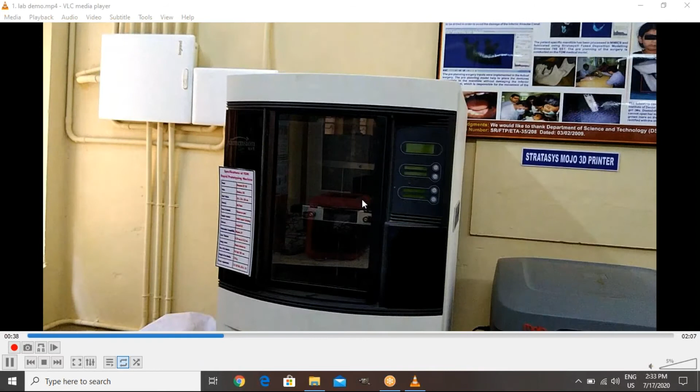This is the dual monitor working station we have at NIT Warangal, and this is the Stratasys Mojo 3D printer along with its post-processing unit. This is a Dimension SST 768, which is also a 3D printer we have, and this is the Ultimaker 2 Plus 3D printer. This is the FlashForge Finder, and this is the micro finder, and this is one more workstation we have.

This is an object scanner we have at NIT Warangal. We have two different kinds of scanners, and this is a ProCircuit which is used exclusively by the MTech additive manufacturing students. They are working here, and now we move on to the metal 3D printer lab at NIT Warangal.

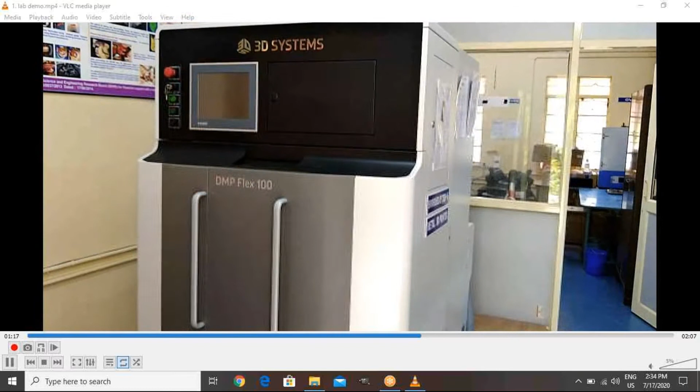This is inside the metal 3D printer lab. This is the metal 3D printer DMP Flex 100 at NIT Warangal, which is capable of producing metal parts. This is the workstation used exclusively for this machine. It's a high-end workstation with 32 GB RAM.

This is the post-processing unit at NIT Warangal. These are the various post-processing units used after printing a part: bandsaw and muffle furnace, as well as a powder receiver, shot peening machine. Here we can see the different types of cylinders - black color, blue, and some brown color - and an air compressor dryer we have here. This is the oven especially used for preheating the powder at NIT Warangal.

Now we move on to the specifications of each plastic machine at NIT Warangal. This is the Mojo 3D printer we have. It is a Stratasys-made 3D printer. The Mojo 3D system builds the model from the CAD STL file that's sent to the system using a USB cable from a dedicated host computer.

This is the printer. We can clearly see there are two print heads. This is one print head, and this is the other print head. These print heads can build parts simultaneously - one print head is for support material, and the other is for the main part material. The support material and part material are both different.

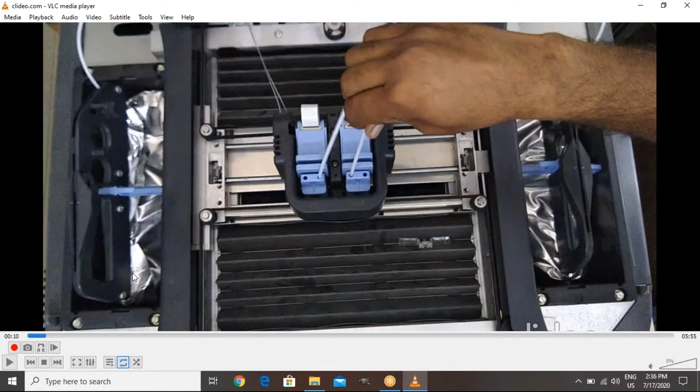We can see here this is the cartridge - this side is the left side and this is the right side. We have cartridges on both the left and right sides, and we load the material in the form of a spool into the cartridge.

Now this is the inside chamber of the Mojo 3D printer machine. We can see this is the 3D printer machine. The build volume for this machine is 127 by 127 by 127, and the layer thickness we can achieve using this machine is about 0.17 mm.

These are the various parts which were produced using the Mojo Stratasys 3D printer.

This is the mandible, some parts we can see here. This is the chemical treatment equipment we are using at NIT Warangal.

This is used to remove the support material. The support material we use, for the Mojo Stratasys 3D printer, is water soluble.

Now what we'll do is take a part that was printed with the help of support structure, and place it into the chemical treatment chamber. We'll close it, pour some water, and wait for the specified time for removal of the support material, as mentioned in the soluble time for that material.

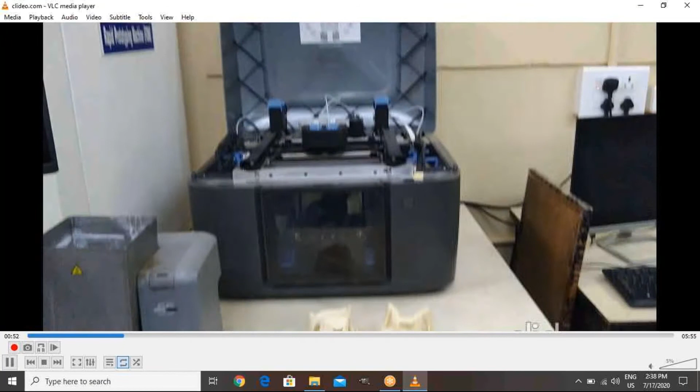After closing it, we wait until the material dissolves, then remove it and take out the parts.

Now see, these are the various parts produced using this 3D printer. This is the mandible part, and these are all our medical parts produced using this Stratasys Mojo 3D printer at NIT Warangal.

The parts produced here are stronger compared to the Ultimaker or the FlashForge Finder we have at NIT Warangal. So these are the various parts produced using this 3D printer.

Next, here is the slicing software we are using, the Print Wizard version 1.2, used at NIT Warangal. That software was provided by the vendor only; it is not freely available software.

Now we are moving on to the next facility we have at NIT Warangal, the Dimension SST 768 FDM rapid prototyping machine, also made by Stratasys USA. Now see here, these are the various parts produced: inlet manifold and turbine blade.

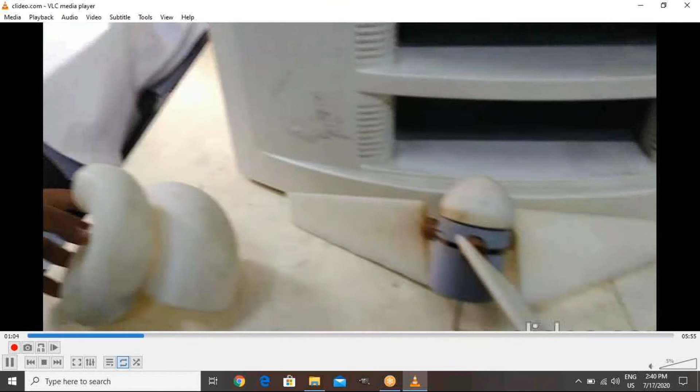This is the inlet manifold, this is the turbine blade, produced by MTech students under Ravi Kumar sir. They worked on this project and successfully demonstrated everything using this machine.

Now we move on to the specifications, which I already explained for this machine. The material we use here is also ABS plastic, in the form of a filament on a spool, along with support removal.

Here the support material is also different from the part material. We feed these two materials in the form of a spool.

The layer thickness for this machine can be changed between two values: 0.254 mm and 0.33 mm. These can be adjusted in the software. The energy source here is a heated extrusion tip, meaning this is an FDM-based machine at NIT Warangal.

Now we can see the build volume. We are opening the window to show it. This is a very large build volume, about 254 by 254 by 305 mm.

Therefore we can produce large parts. Our students produced the inlet manifold as well as the turbine wind blade using this machine, successfully simulating and fabricating them.

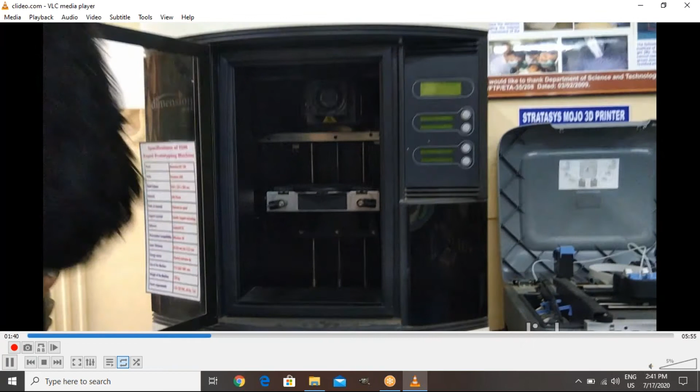Now I can show you the various parts again, which I already showed you here.

The drawback with this FDM machine, the Stratasys Dimension and Mojo 3D printer, is the cost of the spool material. The Stratasys Dimension SST costs around 10,000, while the Mojo 3D printer costs around 10 to 15,000. Because of this high cost, nowadays people are moving to the Ultimaker and FlashForge Finder, since the spool cost is much less for that material.

Now this is the Ultimaker machine we have at NIT Warangal, and I'm going to demonstrate this machine after 5 minutes.

Let me tell you the specifications for this machine we use at NIT Warangal. The technology here is fused filament fabrication, and the print head is a single extrusion print head with a swappable nozzle.

The swappable nozzle means here we are changing the nozzle. We have different types of nozzle. Let us say there are four kinds of nozzles available in our machine: 0.25 mm nozzle, 0.4 mm nozzle, 0.6 mm nozzle, and 0.8 mm nozzle. These are the four different types of nozzles we are using at NIT Warangal.

Already we know what happens when you change the nozzle size. When you change the nozzle size, the deposition of material from the print head increases, the time taken to fabricate a component decreases, and the production rate increases. That's why we are using the swappable nozzle technology here.

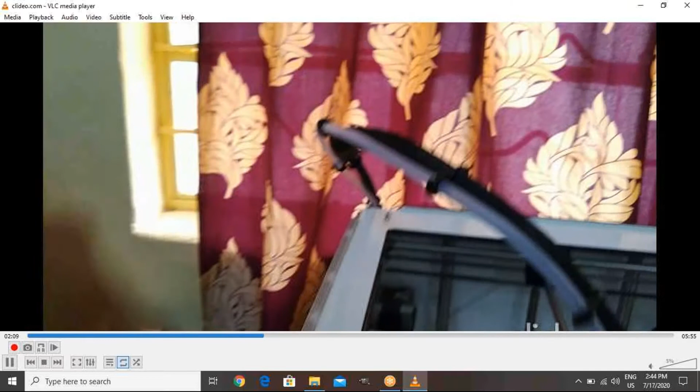We can do the preheating, and this is the filament we are using. The diameter of the filament we are using here is 2.85 mm. The filament for this machine we can directly get from Ultimaker or third party vendors also. Let me say Think 3D. Think 3D is one of the largest suppliers of filament in Andhra Pradesh as well as Telangana. It's headquartered at Vizag. They are supplying this filament for us for the Ultimaker.

It's very low cost. The cost for this filament is about 1500 rupees only. It is also compatible with this machine, and we are producing excellent parts with this. I will explain this later in the working principle of the Ultimaker machine.

And see here, one advantage with this: to run this machine we don't require any host computer. Previously for running the Mojo 3D printer as well as the Stratasys Dimension SST, we needed to connect a host computer or dedicated computer. Here we don't require any separate computer, just an SD card is required.

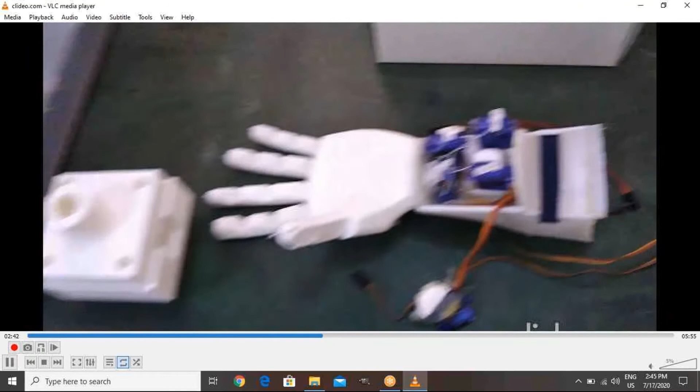These are some finishing tools we are using for removing the support material from printed parts. These are some parts which were produced: a robotic arm as well as a skull, and some plummer blocks. Next we move on to the FlashForge Finder 3D printer we have at NIT Warangal. This is a spool which we are using for this machine.

Now this is the FlashForge Finder where we can see the display, and in the display we can control each and everything. Loading of material, changing of material, everything is controlled with the help of the display. It's easy to operate. People are using FlashForge Finder and Ultimaker because it's a very open environment and very easy to operate.

This is also fused filament fabrication technology. For the FlashForge Finder, we use the FlashPrint slicing software to slice a part. The files can be transferred using a USB cable, USB stick, FlashForge Cloud or Polar Cloud. And here is the filament we are using, a 1.75 mm diameter filament.

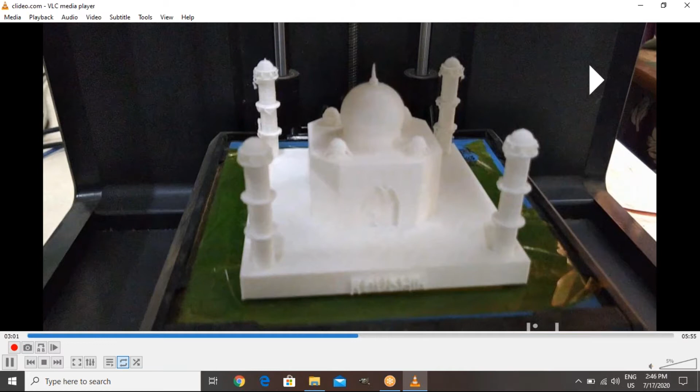See, this is the part. The build volume for this printer is 140 mm by 140 mm by 140 mm. The materials generally adopted for this machine are ABS plastic and PLA. These are the two materials we use at NIT Warangal, and the layer thickness can vary from 0.05 to 0.4 mm. These things we can select in our software. The build accuracy is plus or minus 0.2 mm.

Now see, this is the extruder nozzle, the print head, where we can insert the filament. These are some complex parts which were produced, like the Taj Mahal, in our machine. This is the spool we are holding separately on the spool holding device. This is the filament we are using, that is 1.75 mm. These filaments are easily available.

Now we are moving on to the EinScan scanner. We have a 3D scanner. This is the EinScan scanner. It was already explained by Rakesh in the previous lecture. We are using it at NIT Warangal for reverse engineering purposes, to get the dimensions of an object.

Now we have the 3D scanner. This is the body scanner we are using at NIT Warangal. This was also explained by Rakesh previously. We are using this machine for reverse engineering purposes. This is the workstation we have at NIT Warangal.

Next, we move on to the Prusa i3 3D printer kit. This is the DIY printer we are using especially for MTech additive manufacturing students at NIT Warangal. Let me show. This is the DIY printer. The NIT Warangal MTech students are using this printer.

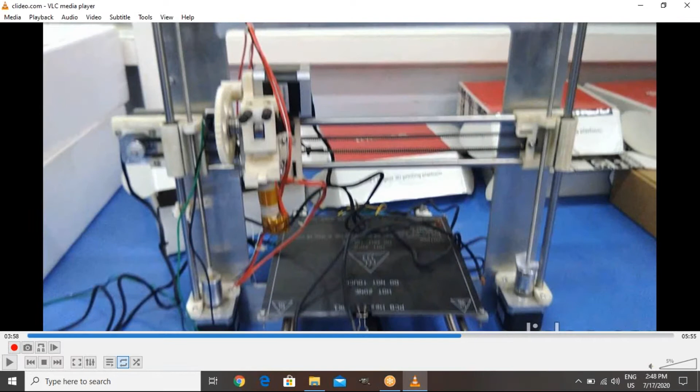We bought only the parts for this machine, and our students are learning the subject, how to assemble it, the principles behind installing this machine, and the Arduino software to run the machine.

To run this 3D printer's RepRap movement, the Arduino software is required. Therefore our MTech students are learning the software, and this was assembled by our MTech students in our lab itself.

There are two different kinds of DIY printers at NIT. This is one more printer we are using right now. Both are working, but we are using one 3D printer. The students are able to work on these machines.

Next, I will explain what software is available at NIT Warangal. These are the seven different software packages licensed in our lab. One is Materialise Mimics 18.1. This software is especially used to model medical models. For a medical model, we don't have any inner dimensions of the heart, lung, bone or anything else. We don't have any direct dimensions. They vary from person to person.

To model such parts, we take CT or MRI data. CT data is generally used for hard tissue, that is bone, whereas MRI is used for soft tissue, lungs and heart. We import the data into the Mimics software, where we can use various segmentation tools to separate the part we want to print using the 3D printer. So Materialise Mimics is generally used for medical model design at NIT Warangal.

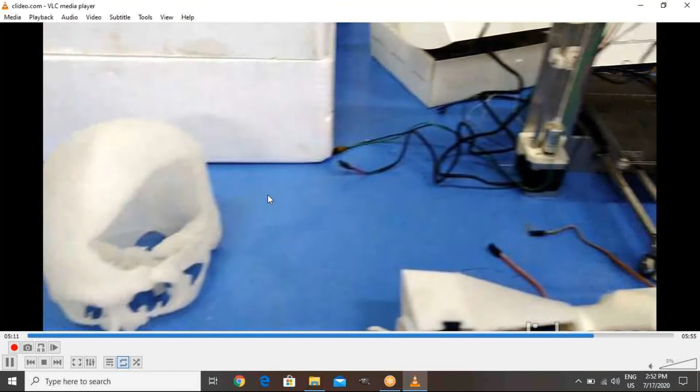This is the robotic arm. This is an animal which was produced in our Ultimaker machine by getting the STL directly. This is the block which has been produced. This is an SLS part, how such a complex part was produced by using the SLS machine. See, this is a block, an arrangement which has been produced.

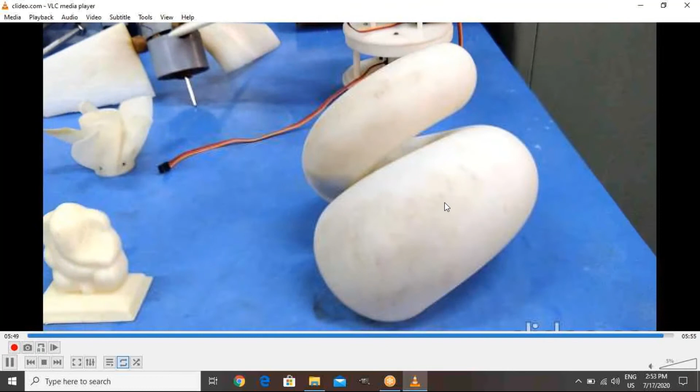So now we are moving on to some engineering parts which have been produced by using this machine. This is a universal coupling which was produced. This is the turbine blade. This is the robotic arm our MTech students have made. This is a Ganesh idol which was produced by using the Stratasys Mojo 3D printer.

Now we are moving on to the Ultimaker demo; the working principle, how to load and how to print, everything I will explain here. This is the printer. This is the print head, the extruder nozzle print head. This is the sharper one. Now this is the vertical screw used for the movement of the vertical z-axis. Now we can see this is a top view. This is the movement. The nozzle can move in x and y direction.

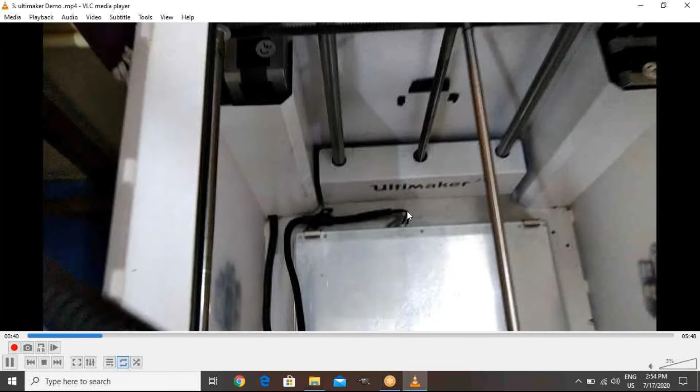See here, I am just showing the movement only, but it is not fully controlled movement. So this is the build plate we are using. The build plate is 200 by 200 by 200. These are the heating and cooling coils we are using. Now see here, this is the build plate. The advantage here is it has vertical movement. The screw is used to support the vertical movement of the build plate once we start the machine.

Now we are going to start the machine. Now I switch on the machine. When I switch on the machine, there are three things. This is the SD card slot. This is the screen. This is the push and rotate button. The push and rotate button is used to operate each and every function, where we can select the material and different options, the maintenance and material, print, everything is there.

See, before we start the machine, we want to generate the G-code file. The part which we want to print, we have already generated by using the Cura software. That part we are using directly from the SD card. Now before starting the machine, I want to load the material. For that reason, see, in the display there is an option. We want to select the material, so that we can load the material.

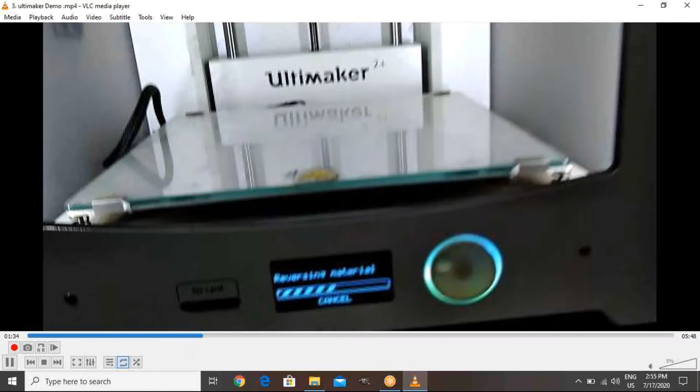Now I am going to load the material by using the push and rotate button. I am selecting the material option. When I start, the nozzle will be moving, but I am still not inserting the material. I am going to insert the material. Now we are using the Ultimaker supplied material. See here, it is reversing the material. That means some material is already there in the machine. That material we are removing, so that we can insert the new material.

And this is the spool holder. This is the feeder. In Ultimaker, we are using this Ultimaker material; this is a PLA material we are using at NIT Warangal. Here this is 2.85 mm diameter. There is a black color spool holder at the back side. I am holding this material at the spool holder in counterclockwise direction, not clockwise, counterclockwise direction.

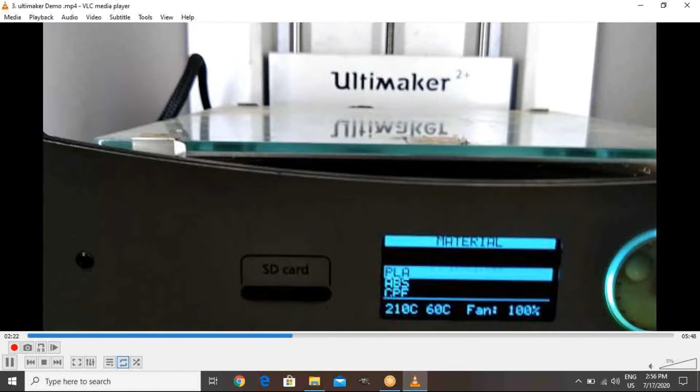Now why I'm cutting the material here is to make it sharp; I want to feed the material into the feeder with a sharp end. That's why a little part of it was cut by using the cutter. Now I am selecting the material by using the push and rotate button. See here, where we can select which type of material. I'm selecting the PLA material by using the push and rotate button. After selecting that, click the push and rotate button. Now it shows heating, heating up the nozzle in preparation for inserting the material.

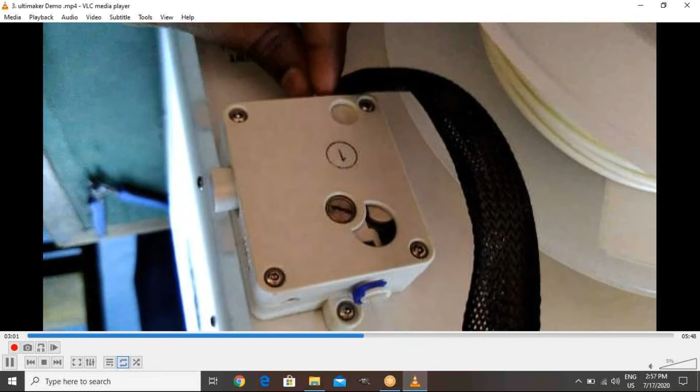So just wait until the nozzle is getting heated, then only we can easily insert the material. This is the feeder we are using here. In that feeder we are inserting the material, not pushing hard, just gently insert the material, just a little bit only. The feeder automatically will take the material. No need to continuously insert the material. Just wait. Once the nozzle is heated, the material will be automatically fed from the feeder to the Bowden.

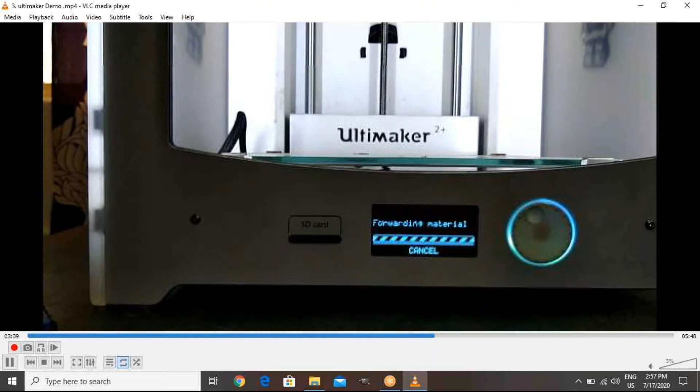Now we can see the material which is coming out from the nozzle very clearly. Just forwarding the material from the feeder to the Bowden pipe to the print head, that is the nozzle. Wait till material is coming out from the nozzle. Just wait a minute. We can see very clearly the material which is coming out from the nozzle. See here, this is the material which was extruded from the nozzle. So we have successfully loaded the material from the backside to the nozzle.

Now next we want to load the part. We are going to print that. We are having the SD card. In that SD card, we have already saved the file, and we have already sliced it using the Cura software, which generated the G codes. That file was copied to the SD card, and that directly we are giving to the machine. No separate system is required to run this machine. Just SD card is enough, or USB cable is enough. SD card is very easy.

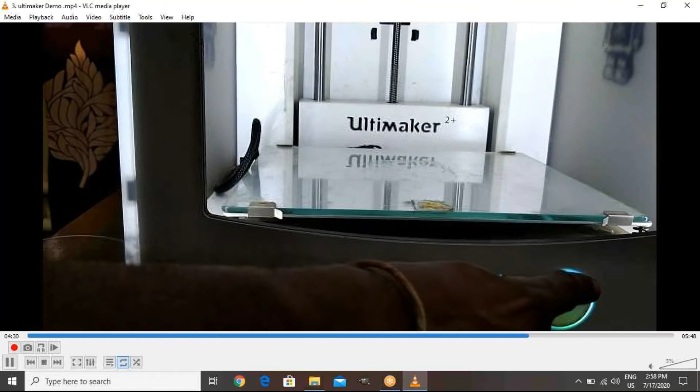Now, from the SD card, there is print. I want to go for print. After selecting print, there are a lot of print files. Now the part which I want to print, that file I am selecting here. Now wait, it is preparing to print your part, and it's tuning for printing. Once it starts printing, the build plate goes in the upward direction. Once the layer is printing, the build plate comes down by the layer thickness.

Here, this is a little bit of material which comes out from the nozzle at the end of the build plate, just for checking the tuning. And now it starts printing our material. I have given the printing of a scaled skull part model. Now it starts printing. This is the first layer, the slicing of the first layer. For this part I have given the raft. You know the meaning of a raft.

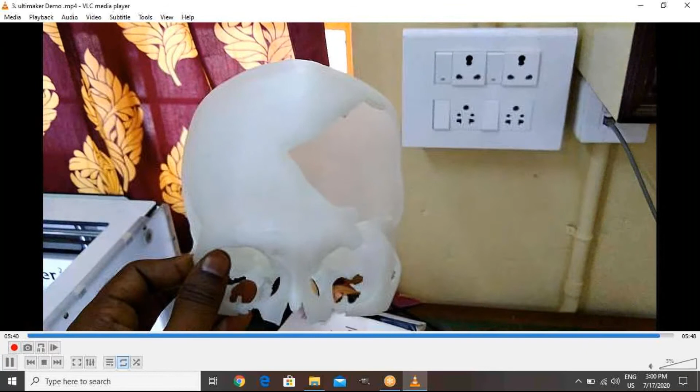Now the display shows the time left for printing our part. It shows 3 hours for my part. If it is a complex part, it may take one day, or sometimes 2 days, depending upon the part. This is the part which I have produced using this machine. I have given less support. See, this is a very less support structure. This part I printed using support structure material, which has been removed.

Now this is about the polymer printing machine we are having at NIT Warangal. Next I will hand over to Banerjee, who will explain the DMP Flex 100 machine at NIT Warangal. After that I will explain post processing.

Banerjee, hello Banerjee. Just hello. Start. You start. Banerjee. Okay. I will make you the presenter.

Okay. So now Banerjee will explain the working principle of the machine. I'm handing over to Banerjee. Later I will start, and finally we'll discuss the questions after completion of the session. Start, Banerjee.

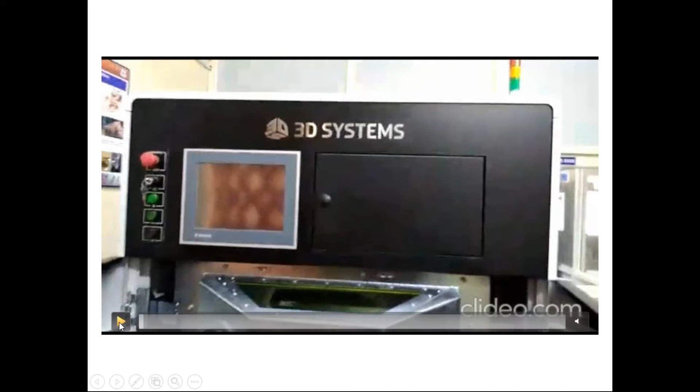This is the control panel. It acts as an interface between operator and machine, where we give the input commands to the machine. This is the laser assembly. Inside we can see the lenses and also some electrical components.

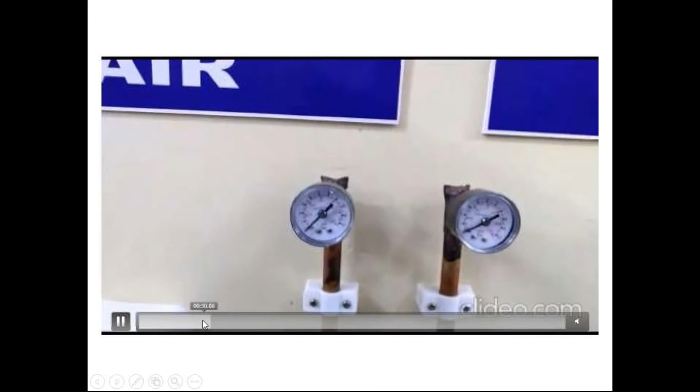These are the valves. This is the gas valve, and this is the air valve. Before starting the machine, we need to turn on the gas and air valves to create an inert atmosphere inside the chamber. And this is the process filter, on the backside of the system. It extracts the fumes and particles generated inside the process chamber during the process.

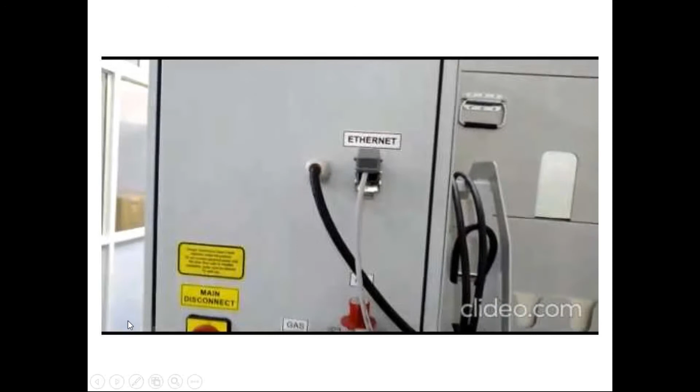This is the input to the system, where we can see the main supplies of gas and air. Before starting the process, we need to ensure the gas and air are always on to create an inert atmosphere inside the process chamber. This is the Ethernet connection, and this is the main switch for the control panel. This is an air process filter to remove impurities in the air.

And these are the controllers. Here we can see the pressure inside the chamber as well. These are the main controls; all electrical components are involved in this.

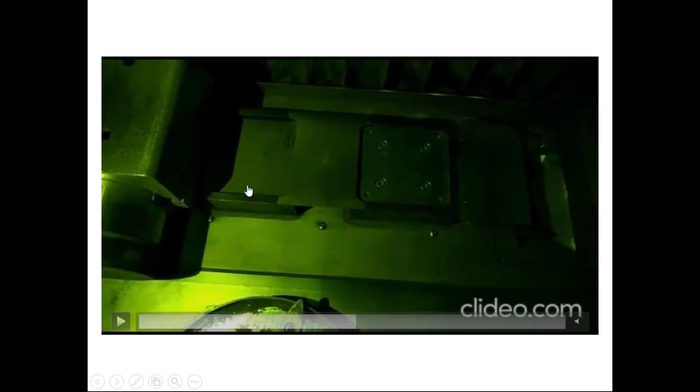Now we look inside the process chamber. This is the supply piston; we supply the powder through the supply piston. This is the platform between the sintering piston and supply piston. This is the sintering piston where the laser sinters the powder. This is the scraper and roller. This is the collecting tank where the unsintered powder will be collected by overflow clamps.

Next, I will show how this process works. Inside, you can observe the airlock. Now it is on the process chamber side, and by clicking the airlock button, we can access the airlock. You can observe the fiber brush to clean the whole process chamber, and also the Allen wrench to fix the substrate on the sintering piston.

Now this is the airlock. As I explained, now it is on the process chamber side. By clicking on airlock, we can access the airlock. We can keep accessories like the fiber brush and Allen wrench, and also a tamping plate to compact the powder for every 30 mm of powder inside the supply piston.

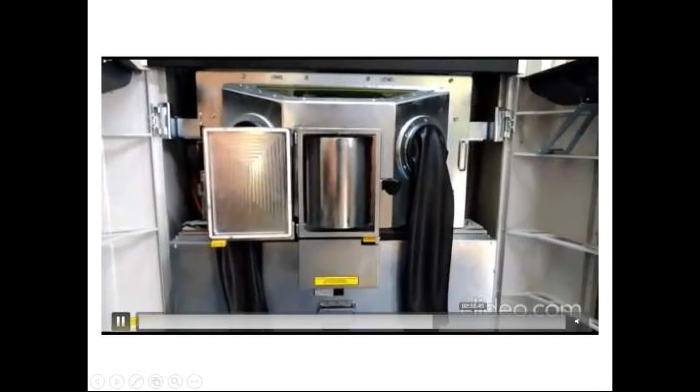By turning the key with the help of an Allen wrench, we can access the lenses, the laser lenses. Before we start the process, we need to clean the lenses thoroughly with the help of aerosol, and we need to wipe with the help of an optical towel before starting each and every process.

Now basically how we proceed: first we create the CAD part, then we import it into 3DXpert, and also orient the part as per requirement. After that we give supports and convert it into a Fab3 file. This machine only supports Fab3 files. Then we can pull the part, and this is the final part. If you want to relieve any stresses in the component, we need to do post processing.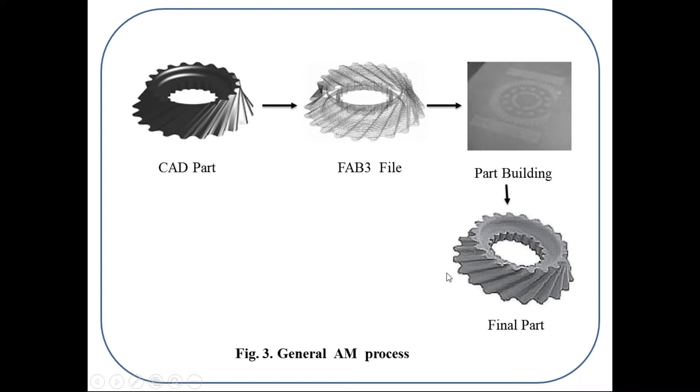These are the main steps involved in the DMP Flex 100. First, build plate loading. We need to load the plate before starting the process. This we can say is sometimes called substrate.

And build plate reference searching, where build plate reference searching means where the build gets started. We need to keep up to the boundary level, meaning where the build gets started.

And material loading and tamping. We need to load the material into the supply piston, and also tamping to compact the powder for every 30 mm height.

And powder bed layering: we deposit the first layer in such a way that it's without cracks and voids on the first layer. Remember, before starting the process, we need to create the first layer without any voids and cracks.

And later we have to do lens window cleaning. Then we go to process chamber inerting to create an inert atmosphere inside the chamber to avoid oxidation. Finally, we build the process.

Here, build plate preparation and loading. We need to clean the build plate thoroughly with degreaser, using a towel with degreaser. We need to clean in such a way that it follows the direction of the brush marks present on the substrate, to avoid residue from the towels.

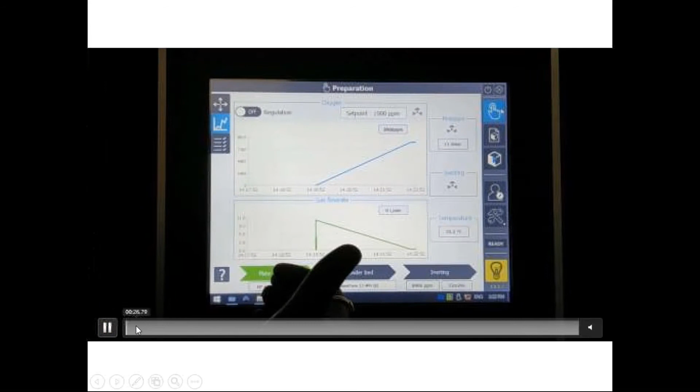Let me explain how we can control motions inside the process chamber. Here, with the carriage, using these two options, we can move the carriage forward and backward. With the roller, we can move it in the forward and reverse direction. With the scraper, we can move up and down. With the supply piston, we can move up and down. In the supply piston we move up to create the deposit layer, and in the sintering piston we move down to deposit the first layer.

In the sintering piston we can also move it up, and these are the controllers. Here the green symbol indicates we can move in both directions, and if it is yellow we can move in one direction, and if it is red we cannot move in either direction. This is the airlock symbol.

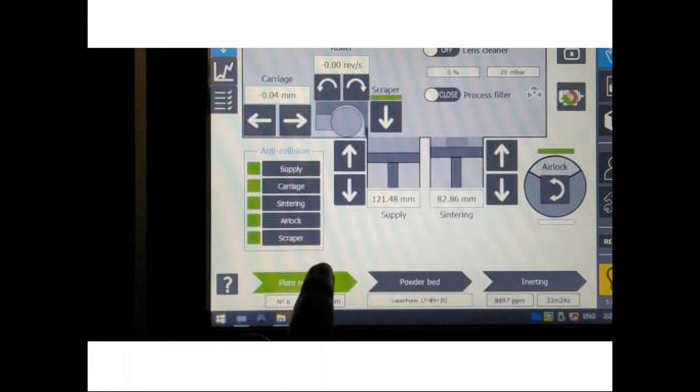Now go to plate reference. Clicking on plate reference, this window will be displayed. Generally we use a 100 mm substrate plate, but here they mention standard plate is 10 mm. We are not using the 10 mm plate, we are using 100 mm, so just unclick it.

Finally, we validate the process. Now this is the plate reference cycle we need to complete.

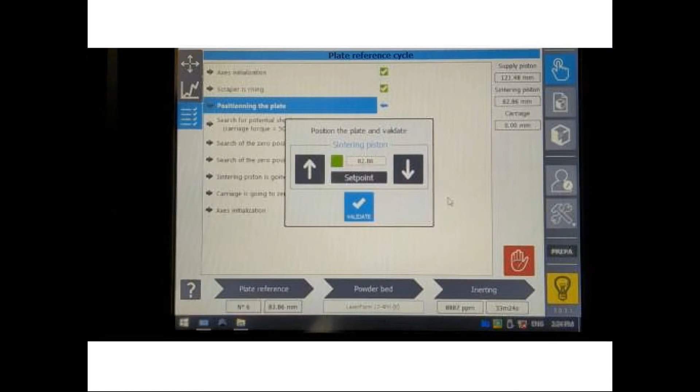With these arrows, the axis initialization is done and scraper rising is done. Now positioning the plate, we need to keep the plate up to boundary level, using up and down arrows to keep the plate at boundary level.

Now it is going down. See, the plate is going down, and validate. Now it searches for potential shocks. The search for potential shocks means the roller moves over the substrate plate. If there is any touch between roller and substrate, a shock will occur. We have to avoid that shock.

We need to get the substrate plate down. Now it searches for the zero position at 100 micrometer. The substrate plate moves up by 100 micrometer, and again the carriage moves over the substrate plate. If the roller touches the plate, a shock will be observed. This time there is no shock.

Again the carriage moves over the substrate plate. This process repeats until the roller touches the substrate plate. It takes some iterations, and finally the roller touches the substrate. Here the carriage is moving over the substrate plate, which we can call sintering plate.

Now they find a shock at 100 micrometer. With the help of the down arrow, we lower the sintering piston by 100 micrometer. Now we rise up the sintering piston by 10 micrometer. Moving up by 10 micrometer, again the carriage moves over the substrate plate. If there is any shock, that is the final position of the substrate plate.

This is the total plate reference cycle. Now the plate is at boundary level finally, where the build gets started.

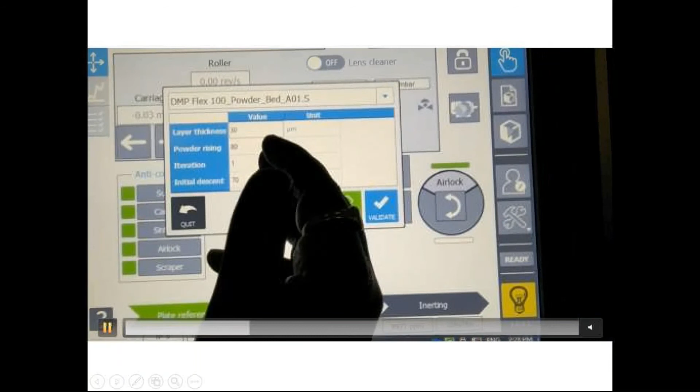Now we are going to powder bed. We need to deposit the first layer without any cracks and voids. Now you can observe in supply piston the powder is below the boundary level. We have to move the supply piston up some extent. Here we can define the layer thickness.

Clicking on the powder bed option, we can access the layer thickness. In depositing the layer, you can define the first deposit layer by layer thickness and also powder rising, how much it needs to rise. Now the powder rising is very below the boundary level, we need to rise it up. This is the iteration, the number of iterations we can do, meaning the carriage moves over the process chamber, over the substrate plate, to deposit the first layer.

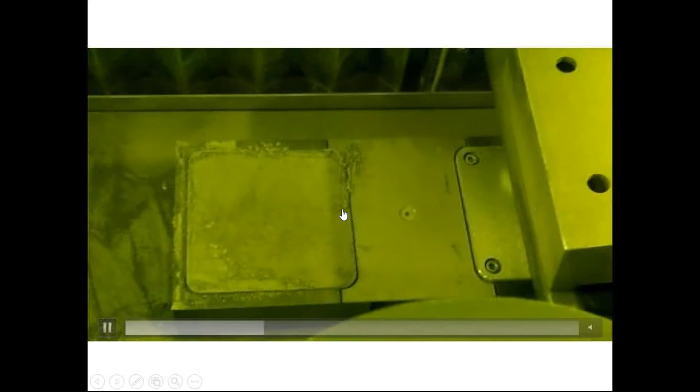Now you see the carriage is moving over the substrate plate, but there is no layer formation. We need to move up the supply piston. See, powder rising, we are increasing it now. Validate.

There is some powder there, but it is not sufficient for depositing the first layer. We need to move up some extent again, with this supply piston. With the help of the supply piston up arrow, we can move the supply piston to a certain height to deposit the first layer.

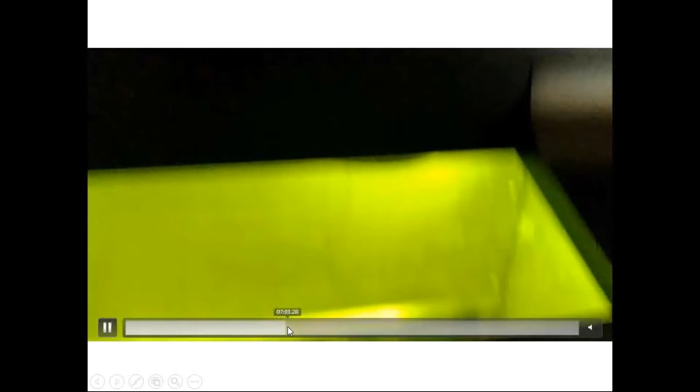With the laser up position now, we also need to fulfill the platform between supply piston and sintering piston as well. Again we are moving up and repeating a number of iterations, and the carriage is moving again.

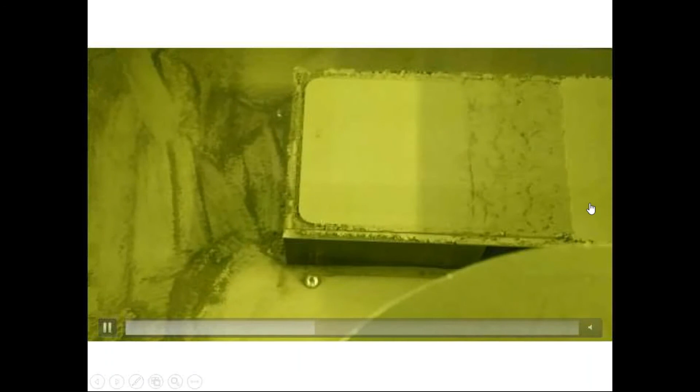This is the number of iterations, he mentioned 3, so now the carriage is moving 3 times. Now the roller is depositing the first layer on the substrate. We can see there are no voids and cracks on the first layer.

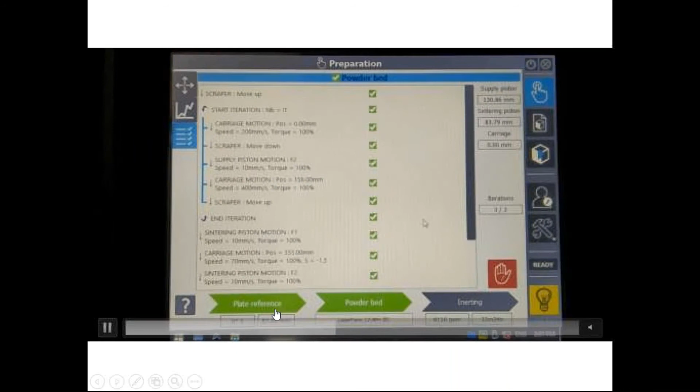Again he is moving the carriage to ensure the first deposit layer is without any cracks and voids. Finally the process is done. This green symbol indicates the process is over. Now the plate reference is done, and the powder bed depositing the first layer is done.

Now we create the inert atmosphere inside the process chamber. Here, currently present inside the chamber is 9000 ppm. This is the set point inside the process chamber. This value of 9000 has to reach 1000 ppm.

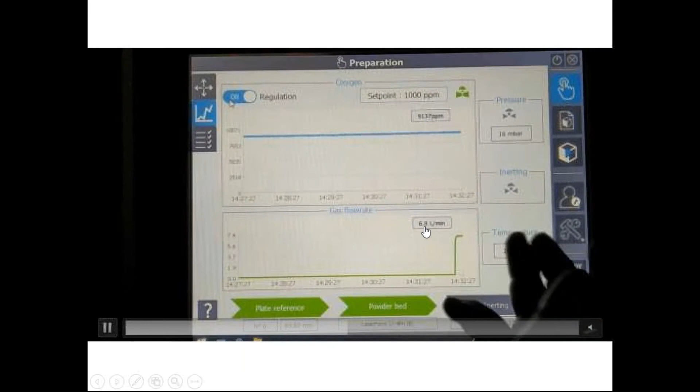Now click on regulation. Clicking on regulation, we can see the gas flow rate is 6.8 liter per minute. Flowing the gas at this rate takes a lot of time, so we need to increase the gas flow rate by clicking on the inerting option. Here, see, 6.7 liter per minute. We need to increase the gas flow rate further, which can be done by pressing the inerting option.

Now we can observe the gas flow rate has been increased. Now it takes only 22 minutes to complete the inerting process.

The green symbol indicates the pressure valve is working. Okay, the inerting means the high gas flow rate is working now. Okay, it takes 22 minutes.

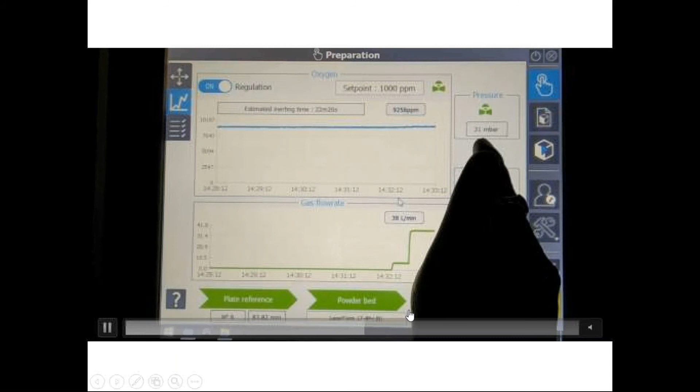Meanwhile, we can load the part into the system. We can build the layers inside the control panel. I will show it. It takes time now to reach 1000 ppm.

Now here I am going to explain how to load the file into the system. Here you can see this is the option. We can click and we can access the files. In my computer there are C and D drive.

If you have the design part inside the disk, you can access the file, but if you have the design outside the control panel, then you keep it on a pen drive.

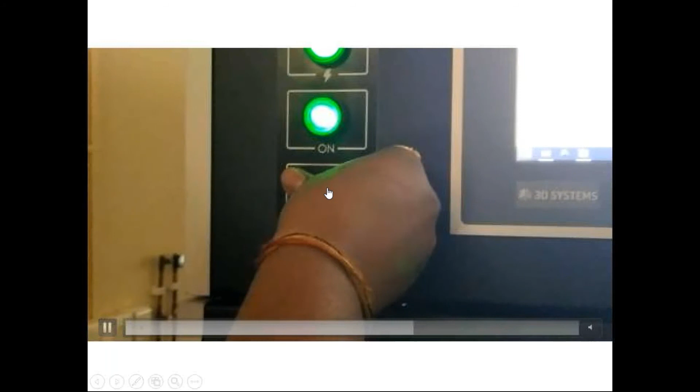And you can access your file. It supports only FAB3 files. Observe the file. As clicking on this file, you can access your files.

And now your file is loading now. Here these are the files.

Here you can see how many objects are on the substrate plate, how many components we can build on the substrate plate. Here total 5 objects.

And if you want to remove, you can remove the objects. As clicking on the object name, we can remove the object. If powder is not available, then we can remove your components.

Here this is the information. These are the components, and here see the compression test specimen. As clicking on this, if you want to remove, you can remove it.

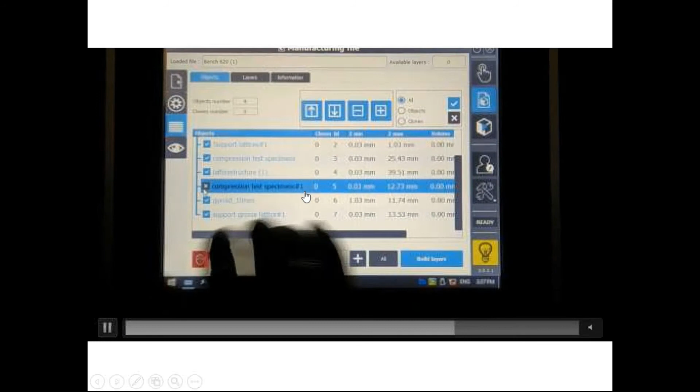Now going to build layers. Here see, this window indicates the lack of powder to sinter this process.

Build layers anyway. Okay, here for printing these 8 components, we need extra powder, but we don't have that much powder in supply position. Okay.

Actually, these build layers is only for storing your components in your system. You can build layers. Okay, we click on yes.

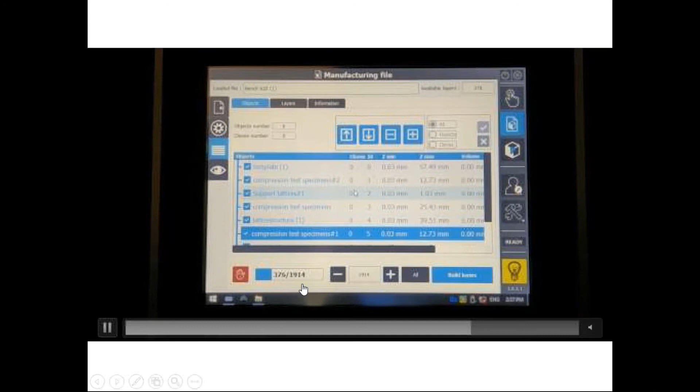Here see, the layers are forming. Now all these components are stored inside the control panel. Later you don't need to put in a pen drive and you don't need to access the files. Okay, these all components are inside the control panel.

Yeah, the building layer is done. Now if you want to see a particular layer cross section, you can check. It is like simulation.

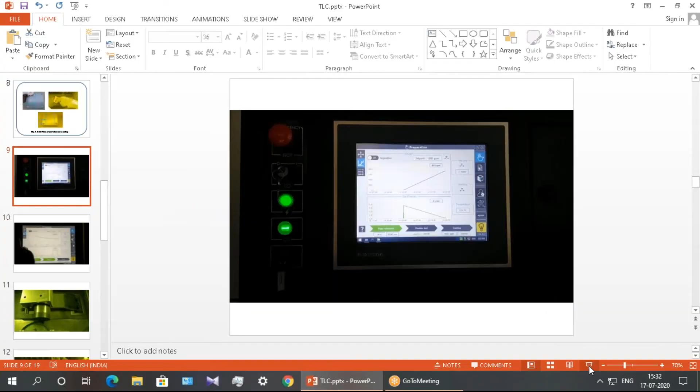Here see, you can see the cross section of each and every component. If you want to see if there is any error, you can also see it's like simulation. You can see here, as entering your layer number, we can assess the cross section of each and every part.

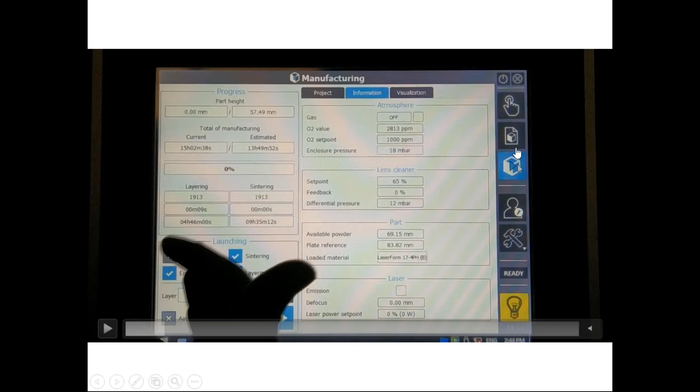Now here you can observe the inerting is done. Here you can see now, before it was 9000, now it reaches 2000 ppm, but it has to reach 1000 ppm. Until it reaches 1000 ppm, don't shoot laser. We need to fulfill this option with 1000 ppm to complete inert atmosphere inside the process chamber.

Here, these are the options. After depositing the first layer, okay, we need to shoot the laser twice, okay, to achieve strong bonding between the first layer and substrate.

And if your cross section is very high, then we need to shoot the laser thrice to achieve strong bond between the first layer and substrate.

Here see, as clicking on sintering, we can shoot the layer. How many times we want to shoot, we can give iterations here. If we put +1, means as clicking on this, we can shoot the layer first, and as clicking again, you can shoot again. This means the first layer we need to shoot thrice to achieve strong bond between the first layer and substrate.

This is the information. You can see the part height, the maximum part height is 57 mm, and this is the current time, and the estimated time is 13 hours to complete the whole parts. This is the estimated time, meaning it updates.

And sintering, the number of layers are 1913, and the laser sinters 1913 layers. And layering, it takes 9 seconds. Here layering takes 4 hours 46 minutes, but the sintering time, meaning the laser working time, okay, takes 9 hours 35 minutes.

And this is the inside pressure, and this is the available powder, the position of plate reference. Now the substrate plate, the sintering plate, is at a height of 83.82 mm.

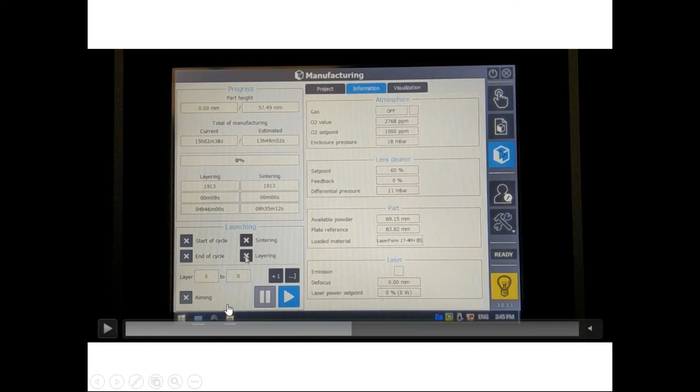And also sometimes if you want to defocus the laser, we can focus below the deposit layer, and also above the deposit layer we can focus. It is all up to you based on the properties of the component. And here we can adjust the defocus.

As I said, I click on sintering and click here, we can shoot the laser. Again we click add +1 and we can shoot the laser.

Now we can see how the laser shoots the depositing layer. Here see how the laser works to sinter the powder. This is the first layer. The laser sinters the powder. See, there are different components. This is one.

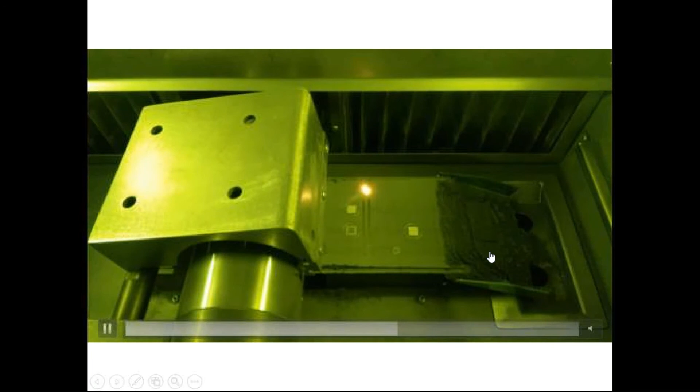Different components are there, and now the roller is moving over the substrate plate to deposit the second layer. Again, the laser sinters the layer as per the required cross section. Here you can observe the unsintered powder will be collected by overflow cans. There are two cans.

After that, the unsintered powder can be reused by sieving followed by heating. It will be explained by Narayana: how we can sieve and how we can heat the powder so it can be reused. Okay. Again, the carriage is moving to deposit a layer. This process continues until we get the required component.

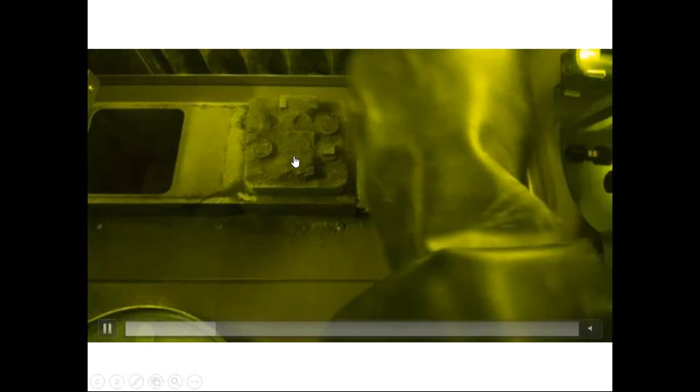Now you see the total component is completed. Total components are completed. This is the benchmark, to test the standards of the machine. The DMP Flex successfully printed all components without any defects.

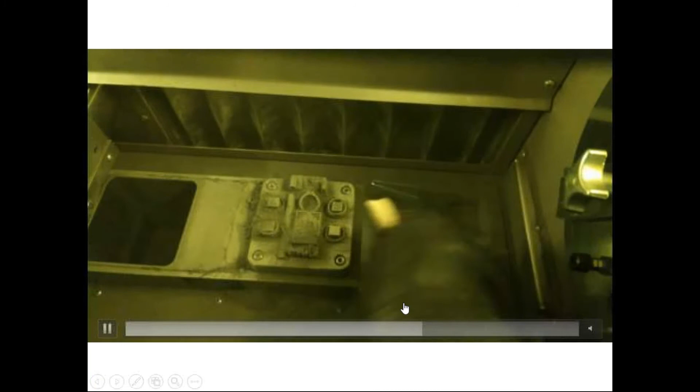Now the sintering piston is okay. We need to clean the surroundings thoroughly before starting the second build. Here see, we are cleaning through the glove box. It is cleaning now. This will be collected by overflow cans, and we can access these overflow cans through the air lock.

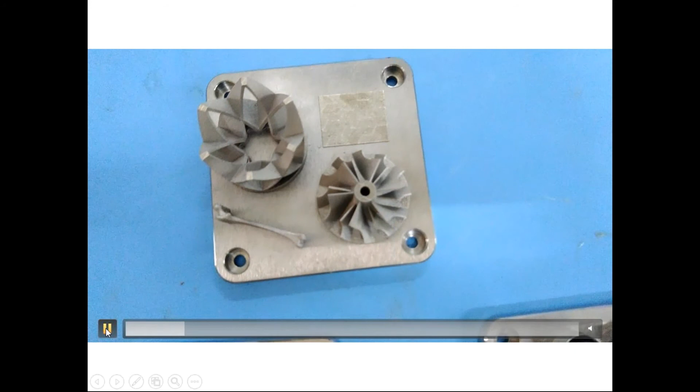And also we can see the turbine component without any supports. As Lokesh sir told, if it is greater than 45 degrees, there is no problem at all. We position the component in such a way that it is greater than 45 degrees. This is the femur bone. See how the complex jobs were printed without any supports.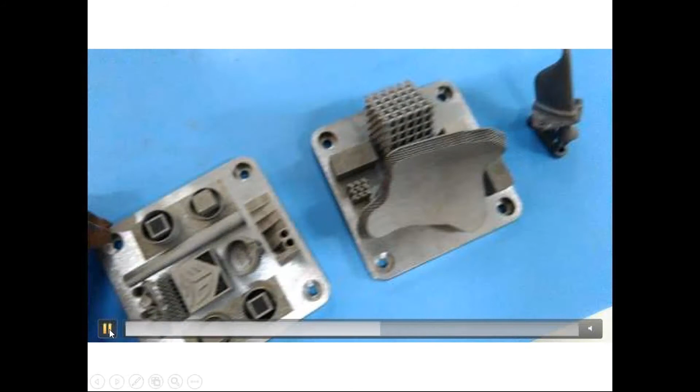And here see the lattice structures. This is the cranial implant. And a nozzle was printed. This is the build plate. See how we can print complex parts without any supports with minimum cost. But if you go to conventional methods, it takes a lot of time to complete. Here you can see the dental templates.

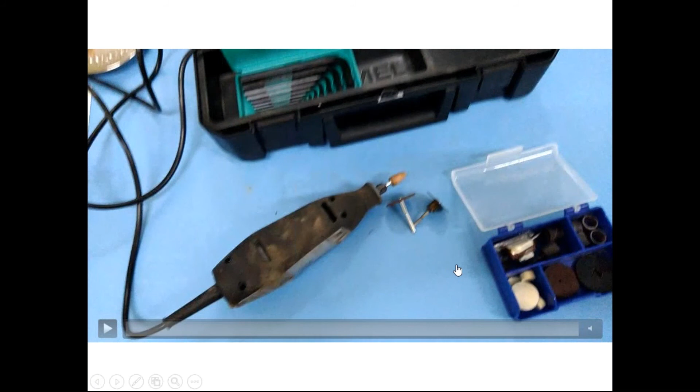Okay, this is the post processing equipment. Okay, thank you. Now Narayana is going to explain about post processing.

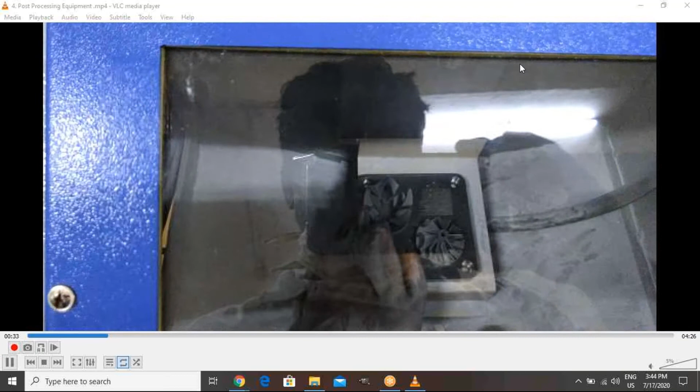So here is the sandblaster we are using at NIT Warangal. This is used to improve the surface quality of a part. We have the part which was printed using the machine. Now I loaded the part into the sandblaster. Now see here, the white one is the abrasive particle. The abrasive particle we are using here is Al2O3.

Now this is the gas connection we are using here. The gas connection is given with the help of a compressor, at very high compressed pressure. This is the nozzle head, from where we supply a very high amount of compressed air along with the abrasive particles. When the abrasive particles along with high compressed air hit the surface, they induce compressive forces and improve the surface finish of the component.

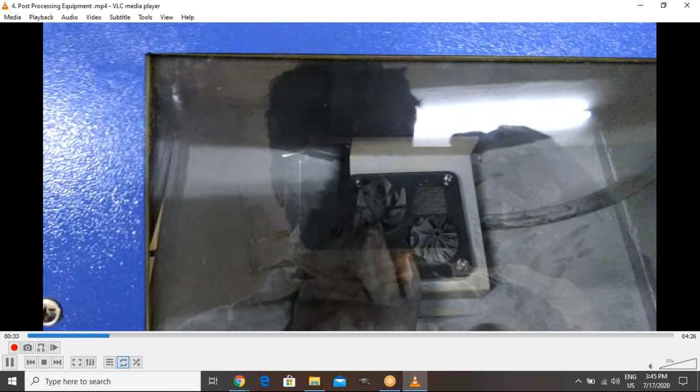We can see this orange one here, that is the hand blower. We can operate the machine with the help of it. After the peening operation, the surface finish produced is good compared to the directly printed part. Now the next equipment we have at NIT Warangal is a muffle furnace. The muffle furnace we are using at NIT Warangal.

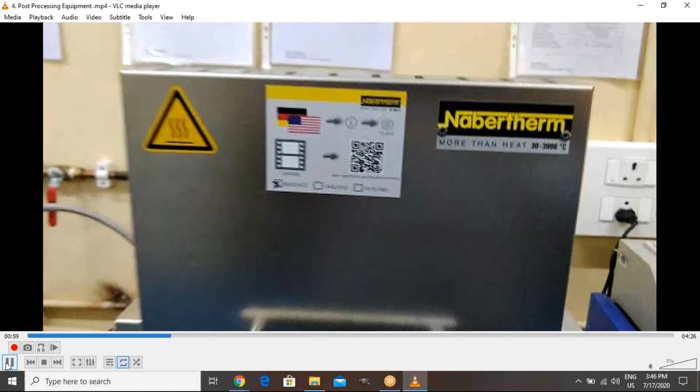See, this is the furnace we have at NIT Warangal. What is the purpose of the furnace we are using? As we know, the parts produced from additive manufacturing are powder bed fusion components. The part produced here has a very fine microstructure. Why? Because it is a very fast cooling process with a high temperature gradient. Due to the very fast cooling and high temperature gradient, the microstructure is very fine, and the part

which is produced is a very hard component. It also has residual stresses induced in the fabricated component. So before any application of the component, we want to relieve the residual stresses, and we want to improve the strength and the ductility of the component based on the application. For that purpose, we are using the muffle furnace at NIT Warangal. We use it for preheating or reheating.

Now the component which I want to heat or preheat, or from which I want to remove the residual stresses, I place inside the chamber and I close it. It's very easy to operate. See here, this is the screen on the furnace. This is the push and rotate button. The big advantage of this furnace is that it's very easy for everyone to operate and easy to handle.

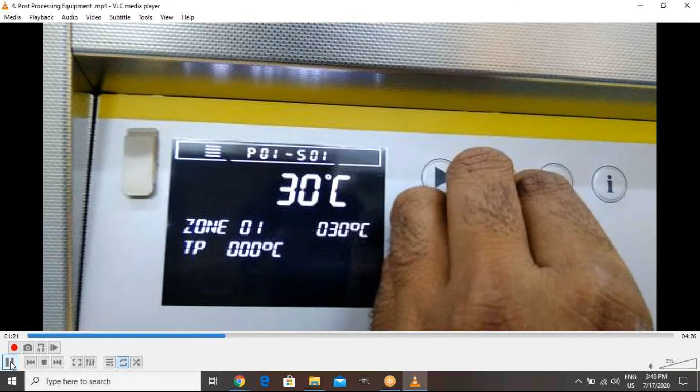It's around 20 or 30 kgs in weight, and the temperature is precisely controlled. It can heat up to 3,000 degrees centigrade. See, such high-precision equipment we are using at NIT Warangal. On the screen itself, we can select the different temperature control modes, and vary the temperature using the push and rotate knob. We can select what kind of material we are loading.

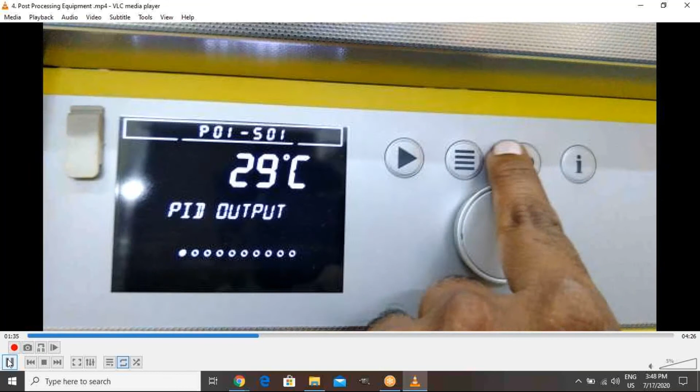Here are 4 different types of materials: 17-4 PH, cobalt chrome, titanium and aluminum. These are the 4 standard materials given for this machine. We can also use this furnace for post heat treatment of any material, but we are using these 4 materials. The 4 material programs have been fed directly into this machine, and here we can increase the temperature in steps of 10 degrees per minute, reaching a maximum of around 3,000 degrees centigrade.

The main furnace working principle has 3 stages: heating, holding, and furnace cooling. Heating: the components produced by additive manufacturing have very fine grains, so we want to increase the grain size. As we heat in the furnace, the grains grow and combine together to form large grains, and heating continues until the new large grains are uniformly distributed. When it reaches that point, we need to hold to get a uniform grain distribution. Therefore, we use the holding time.

The holding time is different for each material; it's not the same for all. For example, for stainless steel, the 17-4 precipitation hardenable material we are using at NIT Warangal, the holding time is 1 hour at 480 degrees centigrade. So heating continues until 480 degrees centigrade, and we hold for 1 hour. After that, we go for furnace cooling.

Next is cobalt chrome. For cobalt chrome, we heat up to 1200 degrees centigrade and hold for 3 hours. For AlSi7Mg material, we heat up to 270 degrees centigrade and hold for 2 hours. For titanium, we heat up to 670 degrees centigrade and the holding time is 5 hours. So the holding time and heating temperature are different for each material.

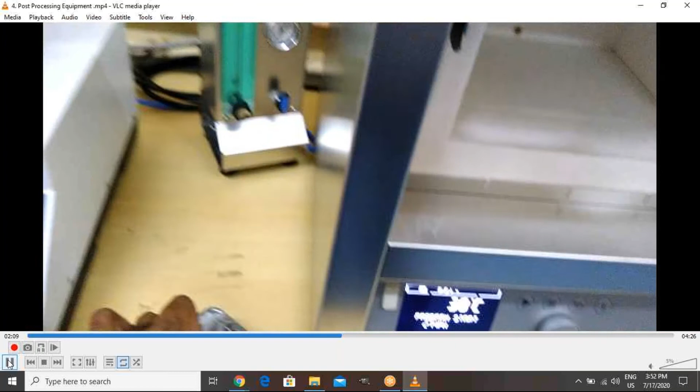We are going for cutting or removing of the material. For removing the material, we use the bandsaw at NIT Warangal. Generally, we use the bandsaw for removing the part from the build plate. For fine finishing operations, we use wire cut EDM. It's very suitable for cutting 3D printed parts.

See what we are doing now. There is a holder. This is a holder to fix the build plate. Once we fix that, we'll start. The blade is rotating and we'll remove the part from the material.

The next post-processing equipment we have at NIT Warangal is a powder sieve, the sieve shaker we can call it. The powder used for additive manufacturing is very high cost, so we want to reuse the powder. Don't directly reuse the powder after collecting it from the overflow cans, because some agglomeration of particles will take place.

The particles may have larger size. When two particles are agglomerated, the particle size increases. It might be some 100 or 110, or some dust will be there. We want to remove those. For that purpose, we use the sieve shaker. The upper one is where we directly pour the powder; the lower one collects the material.

Now see here, this is the material we collected and poured onto the upper plate. This is the lower plate, where we will collect the material. See, this is the environment we are using. This is the time for sieving, and this is the amplitude.

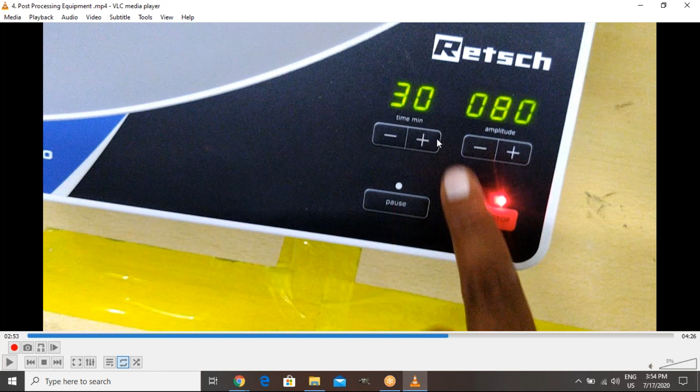The maximum amplitude is 180 amplitude per minute, and the sieving time we can adjust, like 30, 40, 50 minutes. This is the amplitude per minute; we can increase it up to a maximum of 180. Once we set the amplitude and the sieving time, we start the machine.

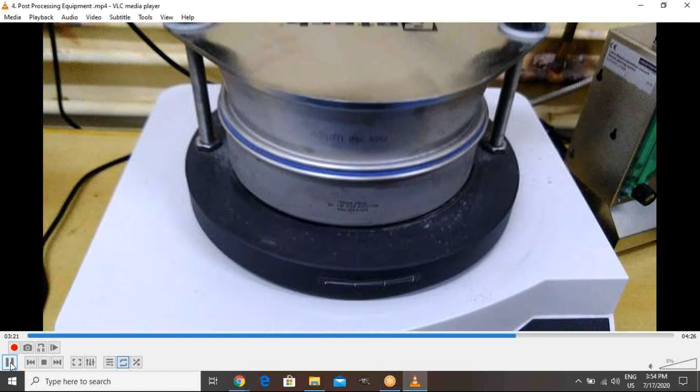Once it starts, it vibrates continuously and the material flows through the mesh on the top one, and the bottom one collects it. After completion of the vibration, we stop the machine and collect the powder. The operation continues till completion of the process.

Now the process has been completed. We collected the powder in the bottom one. This powder will be reused. After collecting the powder, we keep it in the oven. We have an oven at NIT Warangal. Why? After collecting the powder from the sieve, don't keep it in an open environment. Generally, we pour the powder into cans and store it in the oven to avoid moisture attack.